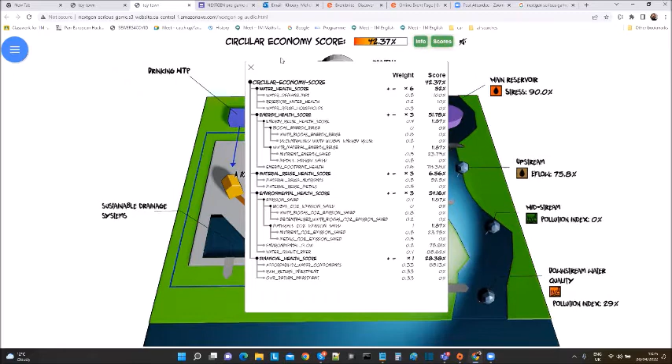So you can click on the top left button, the blue button, and there are different buttons there that you can click on to change different things. For example, you can decide to click on population. You have a population of 300,000 inhabitants, but what would happen if you double your population? What happens to your system?

So if you look at the reservoir stress, you stress 90%, you meet 100% of your water demand, and your pollution is 29%. So I doubled my population, which is not really a crazy situation, might happen. And once I double it, lots of stuff goes red. You only meet 30% of your water demand, your reservoir is stressed 100% of the time, and your pollution has shot up from 29% to 44%.

So the system is on edge. Water is not an infinite resource. And as soon as you increase your population, you will see that it's under stress.

You can refresh. If you want to go back to the default setting of the simulation, for those of you who are playing the game or who are online, you can just refresh by clicking the browser refresh button, and it will work fine. One more thing, the game is compatible with most modern browsers: Firefox, Safari, Microsoft Edge, and Chrome. If you use some other browser, I cannot guarantee the result.

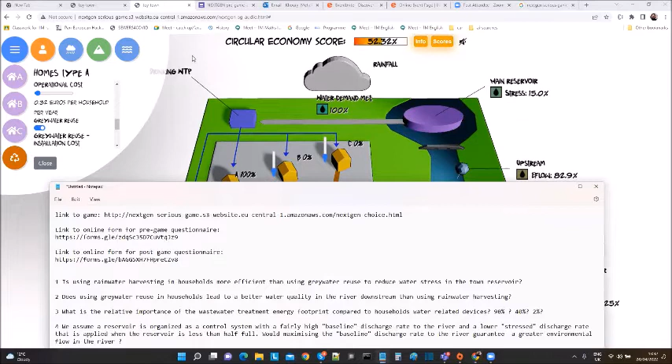So this answers the first couple of questions, which were about what's the difference between these two technologies, roughly speaking. Now, another question is what is the relative importance of the wastewater treatment energy footprint compared to the households when they have water-related devices? Now, that's an interesting point, because if you click on the energy icon at the bottom at the wastewater treatment plant, you will get, if you first refresh the simulation, click the refresh button. So you start from scratch.

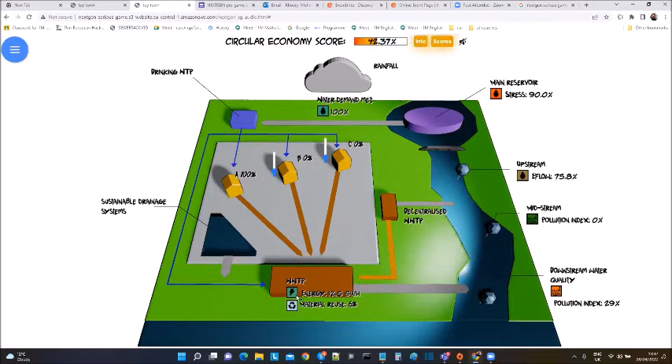And then you click on energy, and then you will see here what is the percentage of the energy footprint for wastewater treatment. It's around 2%, and it's around 98% from households, just for water-related devices. So what comes out of it is there is a strong potential to save energy if you install energy-saving devices or water-saving devices in your households, because you can save on 98% of the energy footprint. Well, if you save on the wastewater treatment, it's important, but you save on 2%. So there's a strong incentive to communicate with households, because that's where most of the savings can be done.

Another element is we look at the reservoir, and I'm going to reset the simulation. If you click on the left button at the top, there is a button called water management. So if you click on water management, you've got access to all sorts of parameters you can change about the reservoir. So what happens is the reservoir is a control system. It has a baseline river discharge, and when the reservoir is not stressed, when it's more than half full, you let by default 80% of the water of the reservoir go to the river. It also has a stressed river discharge. If the reservoir happens to be stressed, less than half full, then you will only let 40% of the water go to the river, because you want to make sure the reservoir is always filled enough in order to supply the town.

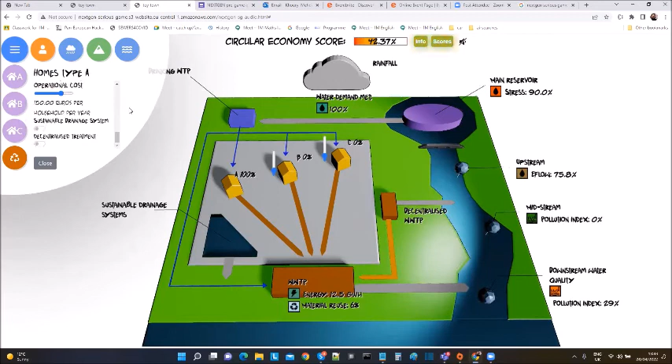We have seen before that gray water reuse was great to reduce water stress, but also quite expensive. That's another aspect of it, but I'm not going to speak about that. At the same time, it didn't do much for your pollution, for your water quality. But if you were to combine the installation of gray water reuse with a sustainable drainage system, then this combination seems a bit like a winner between this pair. You get some lowering.

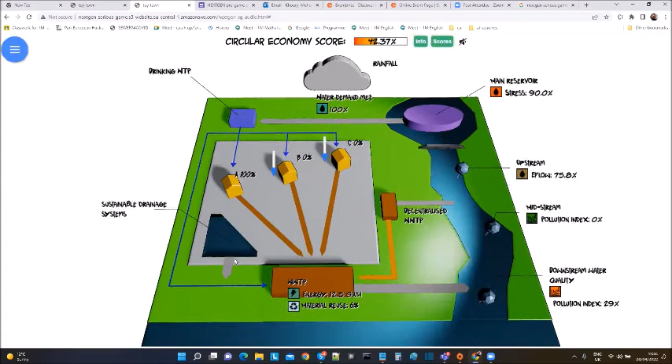One last aspect is that you can recycle nutrients and metals from wastewater. And what came as the most exciting aspect of the project, if I may say so, was that if we restart the system into its default mode, and I click into material reuse, when I click on this icon, you will see in blue what would happen if you were to recycle 85% of the nutrients that pass through the wastewater treatment plant.

And we've made some sort of equivalence and calculation. So because you don't have to mine and refine these nutrients from scratch, this would be for this town of 300,000 inhabitants the equivalent, in energy saving, of having around 8 wind turbines working full-time 24 hours the whole year. It will also be equivalent in carbon sink equivalent to planting around 5% of the surface area of the Netherlands in forest every year, just if you recycle around 85% of the nutrients.

There is also a little evaluation in the market value, but it's not very interesting, in the sense that nutrients are kind of abundant, and there's not much of a case for recycling them in comparison to metals. Now, metals is the bit that is a bit surprising there. If you were to recycle, there's a list of metals in the table. So you could see aluminum, antimony, all these things.

And there is the exergy that you save if you manage to recycle metal. By exergy, it's a form of energy you don't need to spend. That is to say, you don't have to go mine the metal in the earth, you don't have to refine it, you don't have to treat it. So you save a lot of energy if you can recover it. What is shown here is only domestic wastewater.

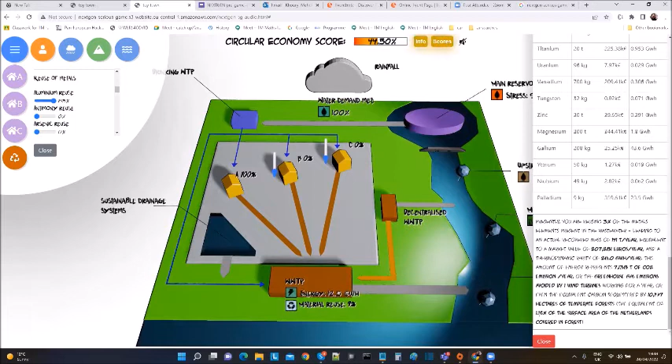Now, the interesting bit as well is you don't need to recover all these metals. Actually, if you look at the very bottom, I've got an indicator. If you only recover 85% of the aluminum, just the aluminum by itself is like planting 1% of the surface area of the Netherlands in forest. So there's a list of 8 metals that have most of the exergy. So if you manage to find a technology, and that's where we're coming, to recycle metals out of wastewater, just concentrate on these 8 or 9 metals, and you will save a huge amount of exergy and therefore carbon emissions.

So that is all I wanted to show you for this fairly short presentation. There's a lot more that can be seen through the game, things linked to cost, things linked to all sorts of other technologies, and how, for example, if you install in households something as small as a new shower head, you can actually massively impact the water consumption in your town and also the energy consumption.

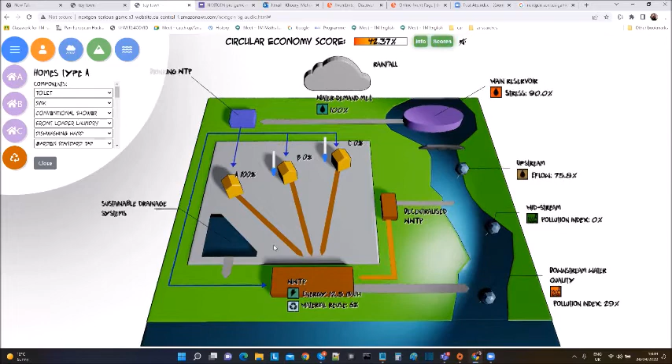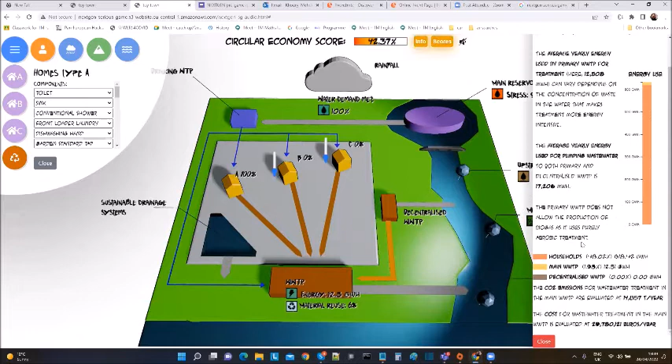So, for example, if you look at your energy footprint, so far 618 gigawatt hours per year for the households, and 12 gigawatt hours for the main wastewater treatment plant, right? And if I was to install in every house, instead of a normal shower head, a fog shower head, a fancy shower head that mixes air and water, then from 600 you go to 400 gigawatt hours.

Now that's a huge saving. So there is a lot that can be done by just changing everything that you can find there, the type of toilets, the type of sink, the type of garden spray and all this, and a lot can be investigated with the game.

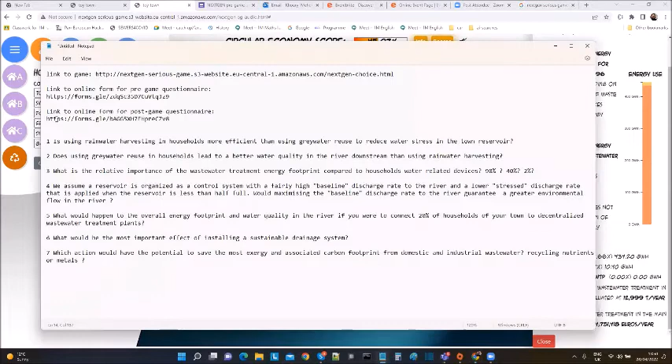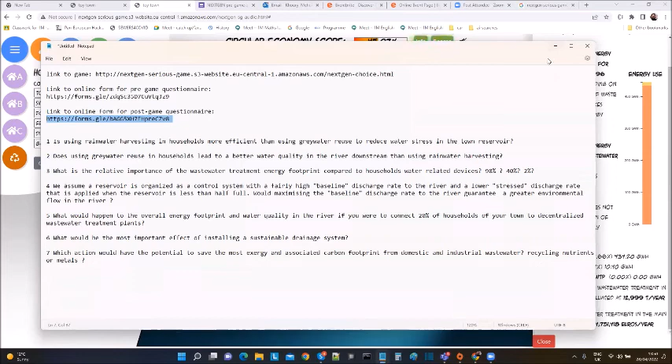For those of you who have access to the internet and a laptop, please fill in the post-game questionnaire. I'm going to put the link in the chat so you can have access to it. It's very important, because if we have the pre-game questionnaire, we can't really work if we don't have the post-game questionnaire result as well. So we can actually make a comparison with what playing the game did to how you answer the questions. So I will put it in the chat right now.

What's this? Yeah, sorry, on the top. Yes, you're right.

Okay. So is this just a game, or could council actually use this to make decisions around upgrading a wastewater treatment plant? Well, it's an interesting question. It's just a game, but you could use it to understand some of the basic dynamics, some of the decisions you should or should not do in some generic case. For example, that some combinations of technology are going to help you. Things like rainwater harvesting are definitely quite helpful, or even the use of sustainable drainage systems.

But at the same time, you can't really have the exact output you wish for your particular case, particularly things like the river flow, for example. Every river is different, and the way the pollution might be amplified by the geographical situation, or the fact that you've got industries in this area, or you don't have any industries in this area. So it can be used, I would say, to help people make decisions by informing them, but not be used as an oracle of some sort for their particular case, if that makes sense. Yeah.

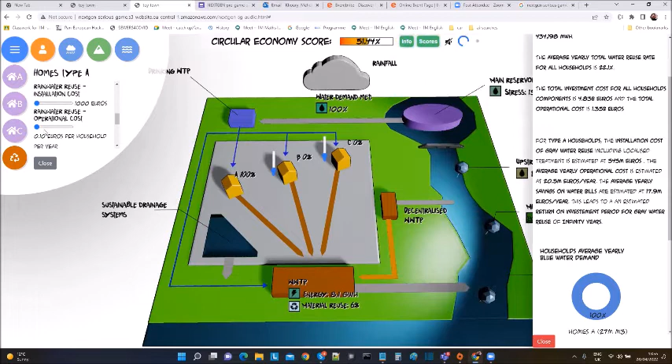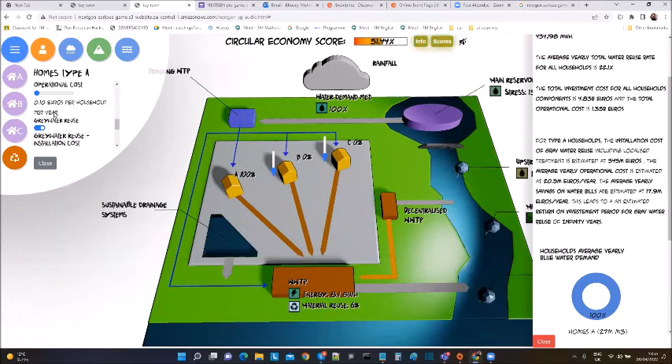Now, I'm not seeing anything right now, so I'm wondering if I'm on the right thing. Yeah, I've got a little problem with my operational cost. For some reason, it's just gone down the drain, literally. Oh, it's because I'm using rainwater. I wasn't changing the right place, so that's why it wasn't changing. So if I change my, yeah, that's why it wasn't working.

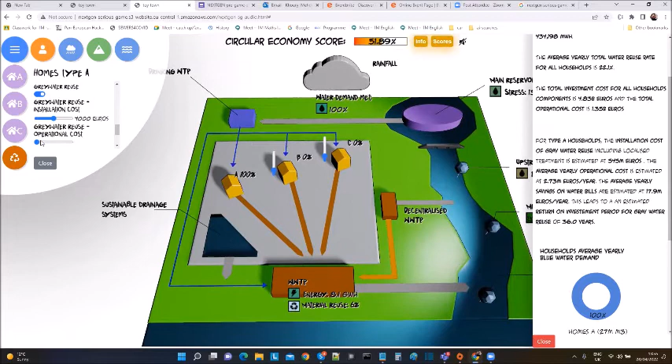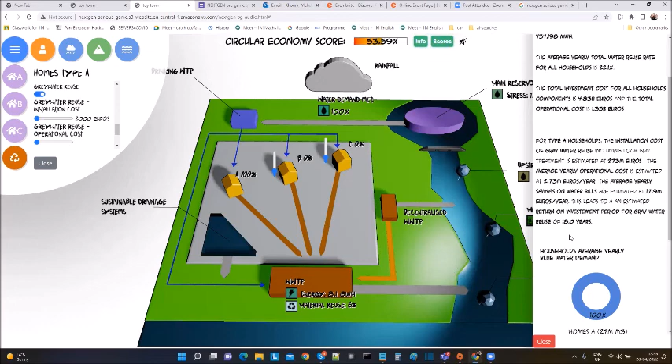If I change my greywater reuse operational cost, and I bring down the initial installation cost, I can get under 20 years, but it's not easy. And this technology seems quite efficient so far. From a cost point of view, it needs some improvement from both sides.